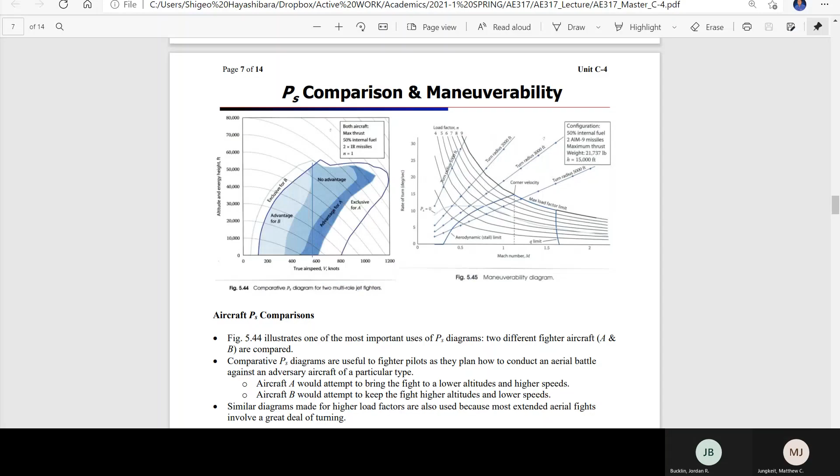He doesn't even move anymore. Good enough, yeah, it's a pattern. It increases as the semester goes on. I can kind of say who is sitting where. Okay, so next class, everyone moves seats.

Yeah, this is actually very strict on EE majors taking summer class. I'm teaching thermodynamics for EE majors. Everybody sits in the same spot in every single class. They never move, so I'm almost thinking of stopping taking record because it's the same thing every class. EE majors are very, I don't know.

Is there any funny stories you can tell us from their presentation on Tuesday? What presentation are you talking about? Something with 200 degrees Celsius water? Well, there was an ANSYS simulation, and they said the temperature of water was 190 degrees C. Then I said it's not liquid anymore.

It is superheated vapor, so a phase change must happen. So anyway, something was wrong in the heat transfer simulation. Did it also say like 1,000 degrees or something? No, it's not that strange. I mean, that's so obvious. Everybody laughed at it, we got a water temperature here of 1,000 degrees. People laughed at it, it's not even realistic, it's not physical.

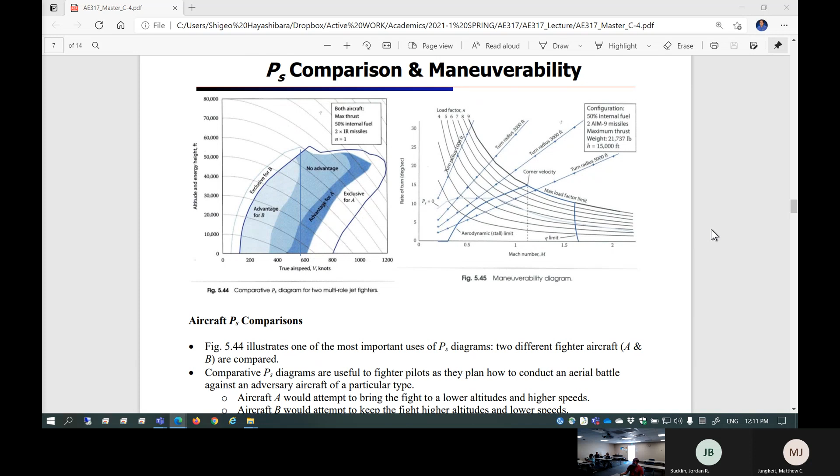Okay, it's not recorded. Alright, so okay, let's begin. Oh my goodness, yeah, maybe you should record it. Outtakes from AE317, he needs a little director thing, he needs to put it on the camera. Director's cut, take two.

So we are going to pick up the PS diagram, and then the other diagram is the maneuverability or energy maneuverability diagram. This is the specific excess power. This diagram basically tells how much the airplane can still maneuver. This is a PS equal to zero contour for two different airplanes. This contour belongs to airplane B, and this contour belongs to airplane A. So for two different airplanes, you can compare the specific excess power plot.

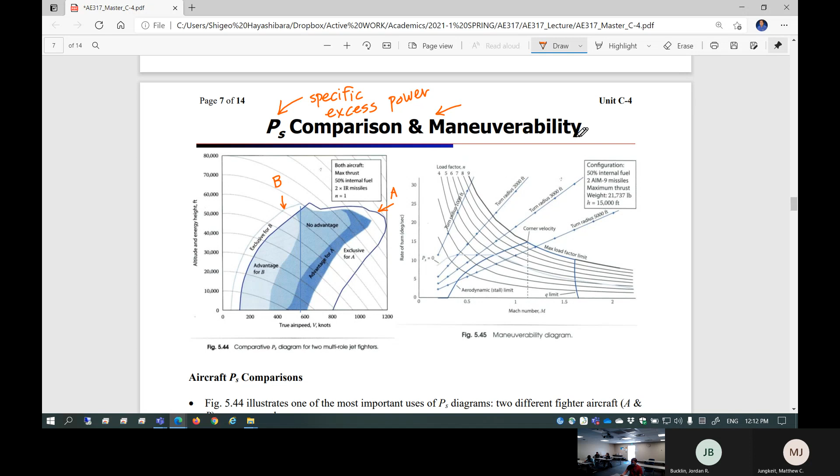This plot actually tells quite a bit of information. Both aircraft have a maximum thrust condition, 50% internal fuel, 2 AIM-9 missiles, and n equal to 1. So this is a level flight, not maneuvering, but maneuver weight, sort of. A combat-ready type of configuration, straight level flight.

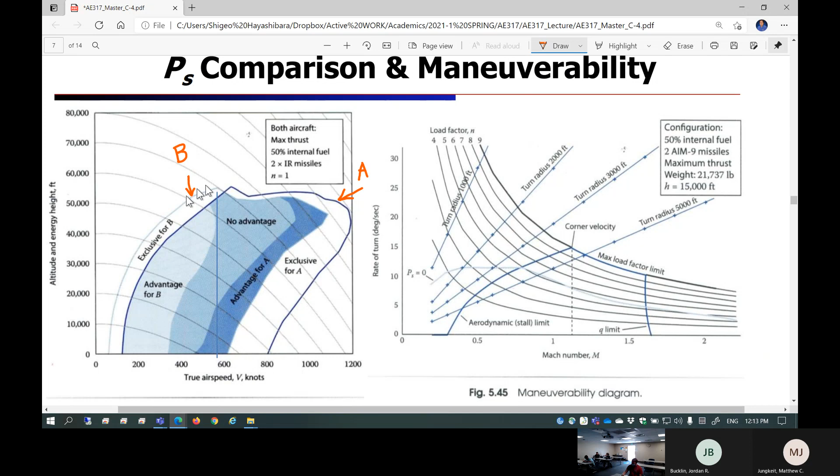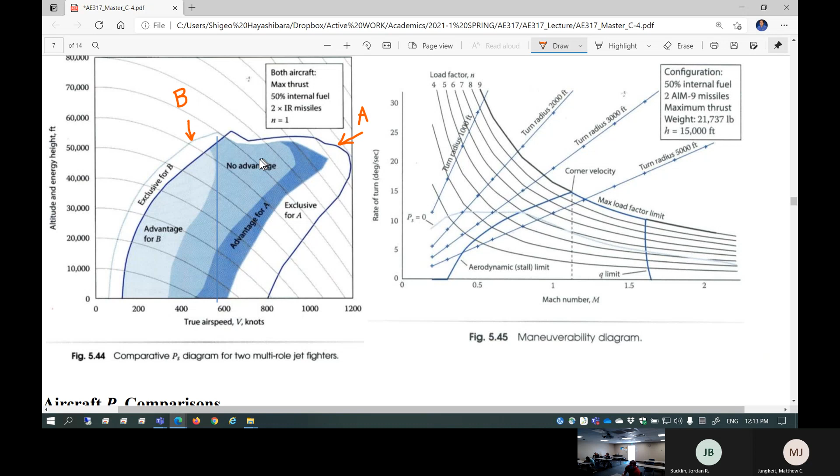Obviously those two airplanes are designed for different regimes of flight. Airplane B is sort of a higher altitude and lower speed range type of airplane, so its flight envelope covers the lower speed and higher altitude, relatively speaking. Airplane A is higher speed, with about the same altitude, but at some altitudes airplane B has an advantage, or is sometimes exclusive. Airplane A cannot maneuver around here. Especially at low speed and from low to high altitude, airplane B has the advantage. And airplane A at the high speed range, almost from low to high altitude, has an exclusive advantage against airplane B. So you can tell those things by comparing.

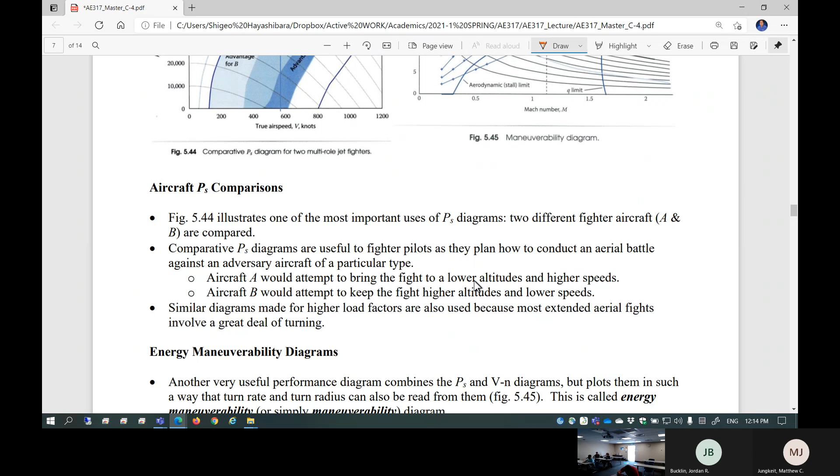This is the aircraft PS comparison, so you are seeing airplane A and B. Aircraft A would attempt to bring the dogfight, if they choose to do so, to a lower altitude and higher speed. That's airplane A, a high-speed airplane, and the maximum speed is also different. Maximum speed of airplane B is about 1,100 or a little bit less, while airplane A goes up to 1,200, at a slightly lower altitude, something like that.

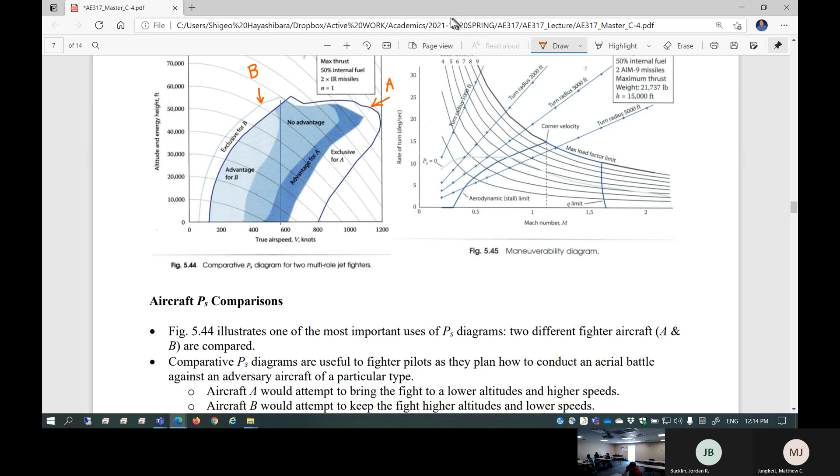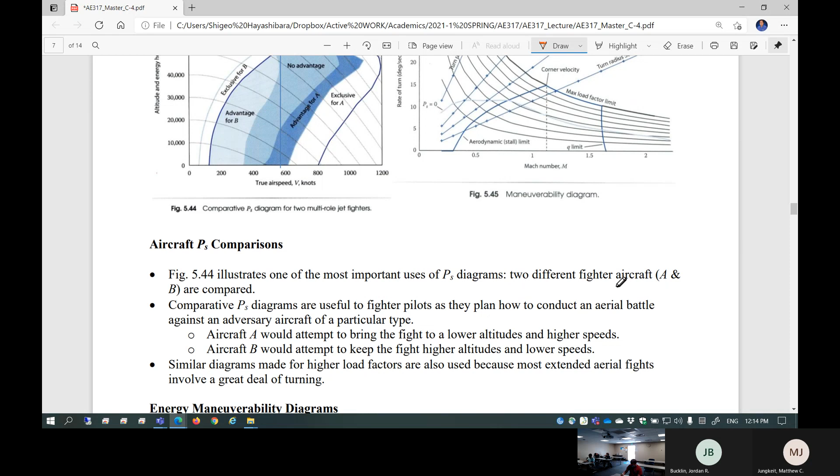So aircraft B is designed for low speed and higher altitude, looks like. Now, obviously, you need to compare those two airplanes with a lot more other data also - load factors, wing loading, engine size, other things. So that is the PS comparison.

So today we want to talk about the maneuverability diagram. This is the diagram we want to take a look at. It's an interesting plot, a composite plot, with lots of information plotted in a single figure, so you have to be very careful reading it. This is based on a single configuration, a fixed configuration.

This is 50% internal fuel, 2 AIM-9 missiles, maximum thrust. Weight is 21,737 pounds specific, and altitude is 15,000 feet. Over this configuration, this is the load factor: 9, 8, 7, 6, 5, 4, this is 3 and 2. So the load factor plot is 2 to 9, positive load factor.

And then plotted against this is the turning radius. Turning radius is also a contour, a straight line: 1,000 feet, 2,000, 3,000, 5,000. Now one thing which is missing is 4,000 feet - it's kind of skipped between 3,000 and 5,000, so I wish I would add one more line here. 4,000 is in between 3 and 5, so I'm going to add another straight line, something like that. This is 4,000. Before we move on, for some reason the 4,000 feet line is missing.

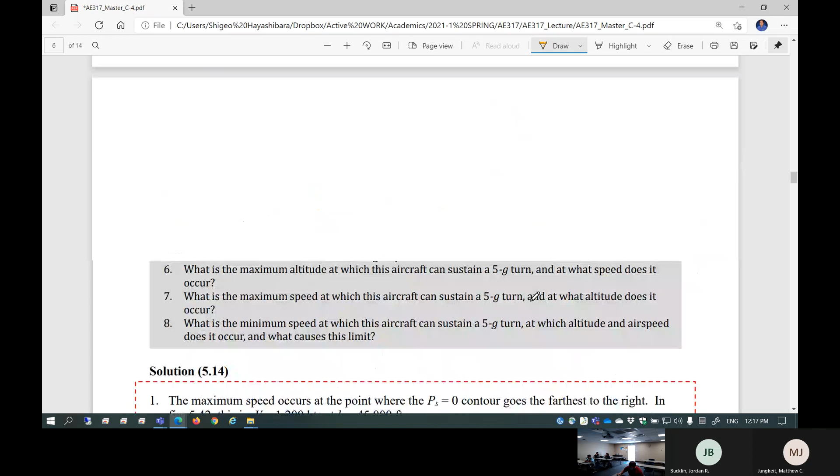All right, and then other things - this is a PS equal to zero contour. Let me just trace it out with different colors. So this is the PS equal to zero contour line, plotted like this, and that corresponds to one of those things. And also this one - this is the aerodynamic stall limit line from the V-n diagram. If you go back to the V-n diagram, this is the aerodynamic stall limit line, which is this line. It actually corresponds to this line being plotted.

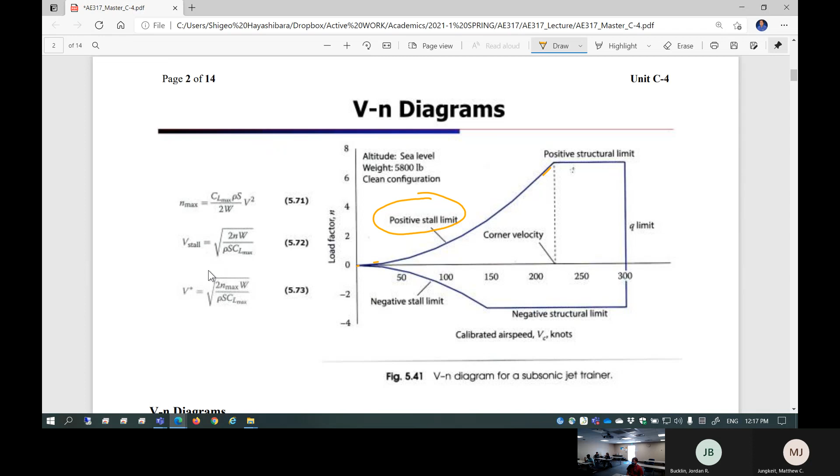So for those two lines, is anything on the line, or is it anything above or below? I'm talking about the graph from before - so this is the aerodynamic stall limit. That means everything above is stalled, so it can't do any of those turns. That's right.

Wait, if PS is equal to 0, does that mean anything above that isn't also technically possible? That's right, it's actually instantaneous. PS equal to 0 gives you sustainable turn. Anything above it is unsustainable, but you can still instantaneously perform that, so it tells you instantaneous performance too, it just doesn't sustain. So you could pull it for a second and then lose it? That's right.

Okay, so right here, the maximum load factor 9, and then this aerodynamic stall limit crosses over here. This point is the corner velocity. So this is V-star.

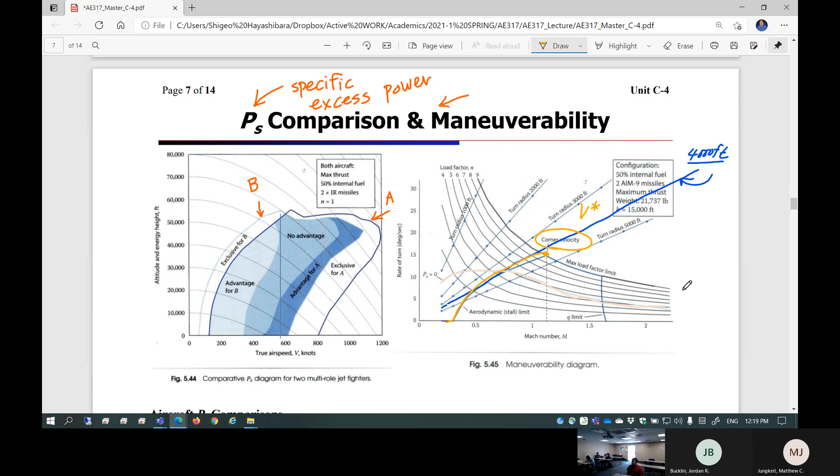So this is a combination of the V-n diagram plus turn radius overlaid on top of it. This is the energy maneuverability diagram. An important thing is the PS equal to 0 contour is also plotted. Inside of this contour is sustainable because you still have excess power, but outside of it you cannot sustain it. You can only instantaneously turn that radius, but you cannot maintain that. So this is called the energy maneuverability diagram.

So one important thing is this is the combination of excess power and the V-n diagram, combined together, with at least the PS equal to 0 contour given. So PS equal to 0 contour is overlaid with the V-n diagram. This is basically a plot where turn rate and turn radius can both be read off. That's why this is called the maneuverability diagram.

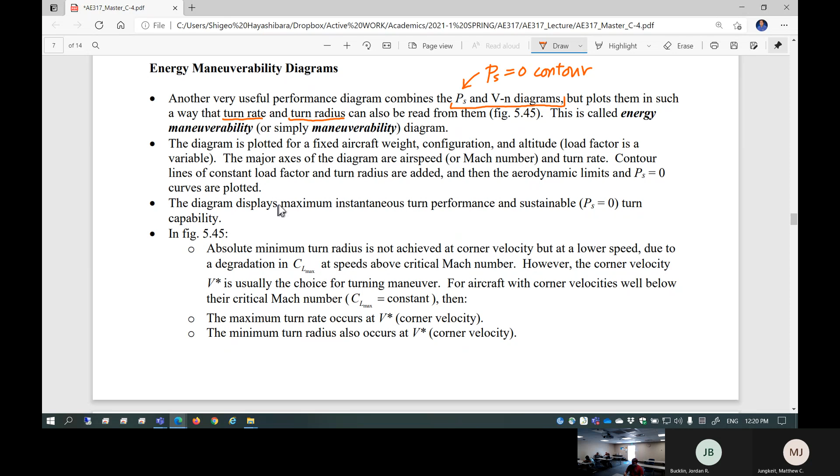And this is basically plotted for fixed aircraft weight, configuration, and altitude.

All right, so this is actually kind of interestingly confusing. You have to think a little bit about what it means. The absolute minimum turn radius is not achieved at corner velocity, but at a lower speed.

If corner velocity is beyond the critical Mach number - oftentimes this is the case - corner velocity is often above critical Mach number. If so, corner velocity is not going to give you minimum turn radius. It could give you maximum turn rate, but the turn radius kind of overshoots because you're flying at a really fast speed. But typically, the corner velocity is the choice for turning, usually.

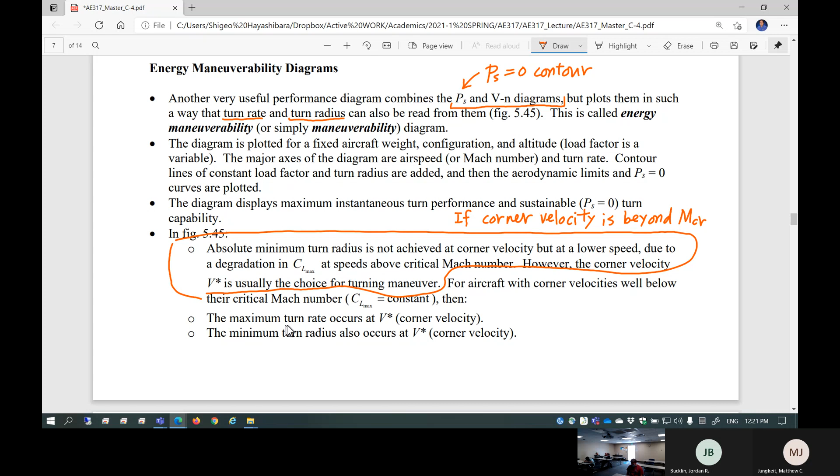So let's be careful about that. If the corner velocity is beyond the critical Mach number, you can only get maximum turn rate, but not the minimum turn radius. To achieve minimum turn radius, you have to fly at a lower speed than corner velocity. This actually happens for high-speed airplanes. Especially if you design a high-speed airplane, corner velocity is much higher than critical Mach number. In such a case, you can maximize the turn rate, but you cannot minimize the turn radius. To minimize the turn radius, you have to fly slower. Does that make sense?

Most of the airplanes you design are low-speed airplanes. If so, don't worry about this. For a low-speed airplane, corner velocity achieves both maximum turn rate and minimum turn radius. So in this case, for high-speed airplanes, you have to fly slower to minimize the turn radius.

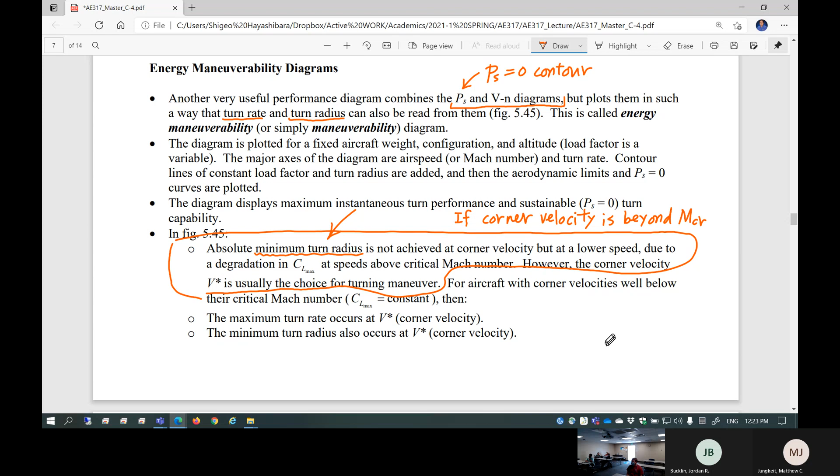All right, so that's what I'm trying to say here. For your design, every single airplane you're designing right now probably has corner velocity giving minimum turn radius and maximum turn rate anyway, so don't worry too much about it. But for some high-speed airplanes, this actually happens.

Okay, so this is example C-4-3. There are three questions for this example problem. Let's take a look. What are the maximum instantaneous turn rate, minimum instantaneous turn radius, maximum sustained turn rate, and minimum sustained turn radius at h equal to 15,000 feet? This is the plot for h equals 15,000 feet for the aircraft whose maneuverability diagram is given here.

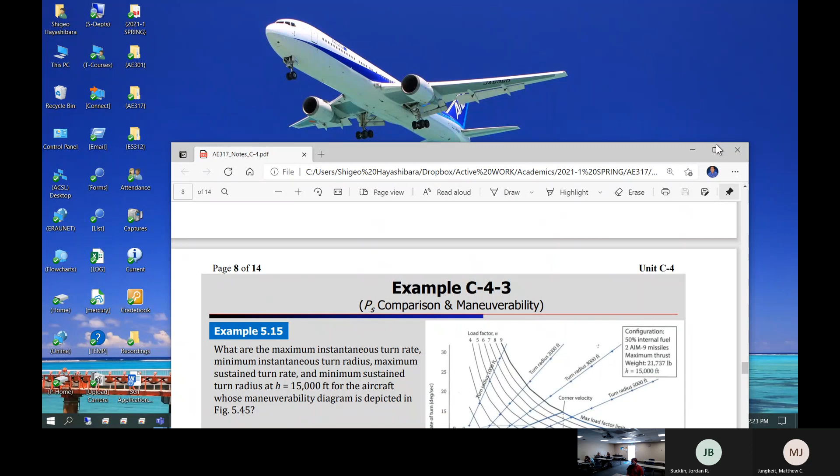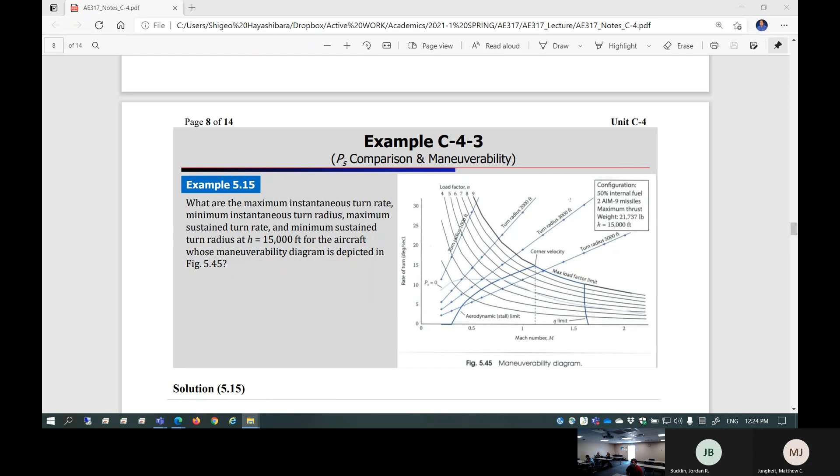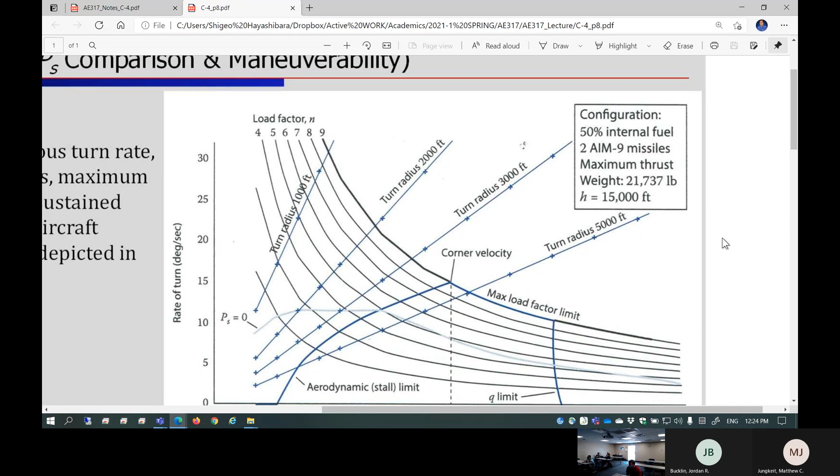Okay, so I'm going to bring up the figure. I really want to zoom in to this figure. So first question is, what is the maximum instantaneous turn rate? Number one, maximum instantaneous...

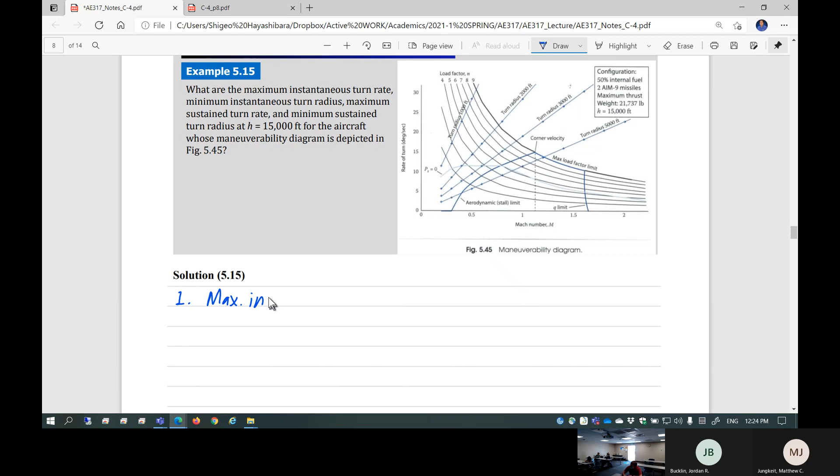So you're talking about, what's the condition for that? This is a corner velocity. Now, question is, is this sustainable too? It depends on your PS diagram, of course, yeah?

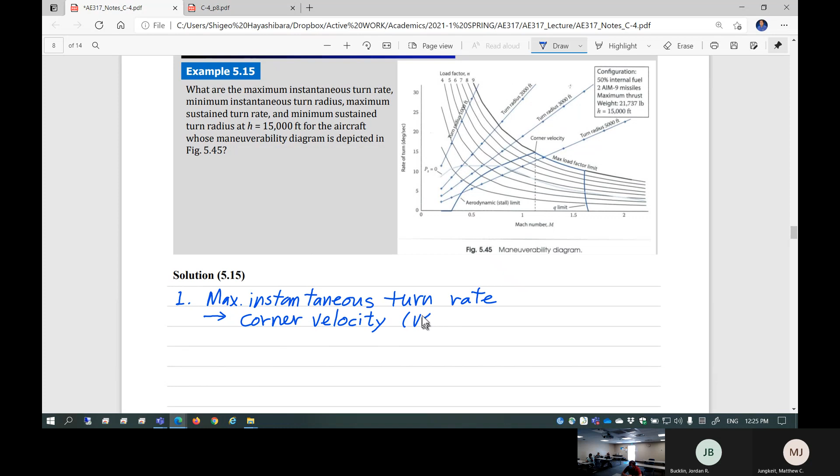Corner velocity, V star, so you're going to pick up the corner velocity. If you really zoom in, corner velocity is the crossing point between the aerodynamic stall limit and where it reaches the maximum load factor limit right here. So this is the corner velocity.

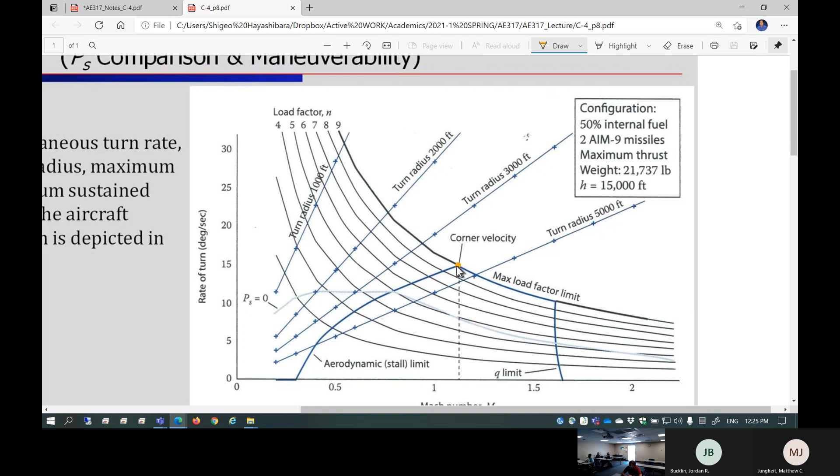So you can read off the Mach number corresponding to this. This is the corner velocity Mach number. And then you can basically read off this value about here. That's the rate of turn. So this is the instantaneous maximum rate of turn because your airplane is flying at the corner velocity.

So let's just go back here. This really is going to give you the read off of Mach number. What's the Mach number, by the way? Anybody? 1.15 based on the textbook. Oh, pretty. That's pretty good.

And then the rate is about 15 degrees per second, by read off. Okay, so this is actually corresponding to corner velocity.

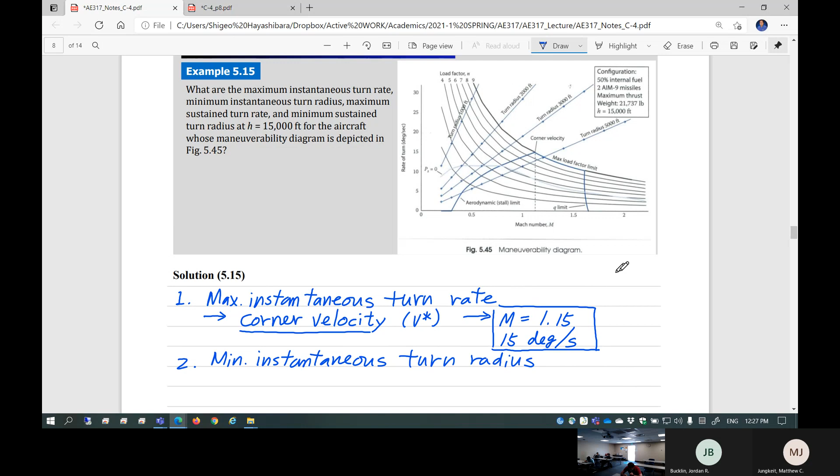Question number 2, minimum instantaneous turn radius. So this depends on the stall characteristics of your airplane. In other words, you want to make a very, very tight turn without the airplane being stalled.

So this is a crossing point between the aerodynamic limit line as it crosses the lowest valued constant turn radius line.

This is kind of tough. The reason is, I added one line. Where is it, oh okay sorry, let's just go back here. So what I'm talking about is, this is the aerodynamic stall limit line.

Along this line, your airplane actually stalls or is not stalled, it's just a borderline, okay? Anything above, your airplane stalls out. So by maintaining this line, what is the minimum turn radius? Well, obviously, a turn radius of 3,000 feet is impossible. So it's going to be bigger than that. Now, so is that 5,000 feet? I don't know. Suppose I can only imagine a 4,000 foot turn radius, but it's not drawn here.

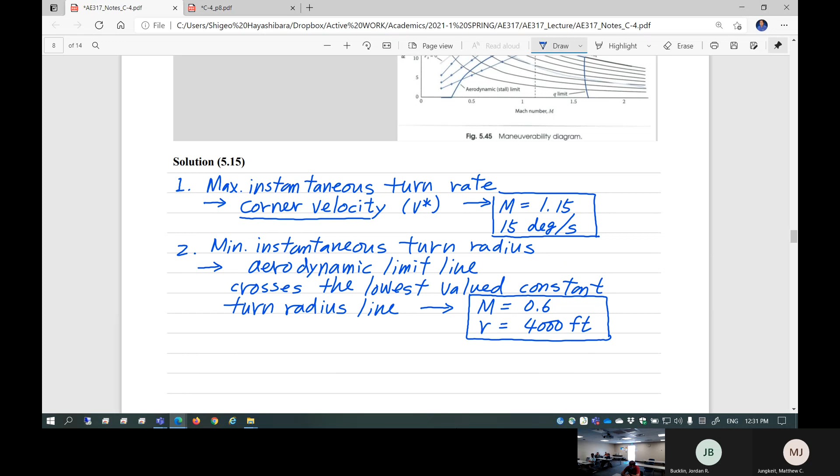Now, if this is an exam problem, I will probably add the 4,000 foot line myself for the figure, so that it's more clear. This is not so clear. This is probably the second nature of Air Force Academy people, to make things not so clear. I don't like it, but anyways.

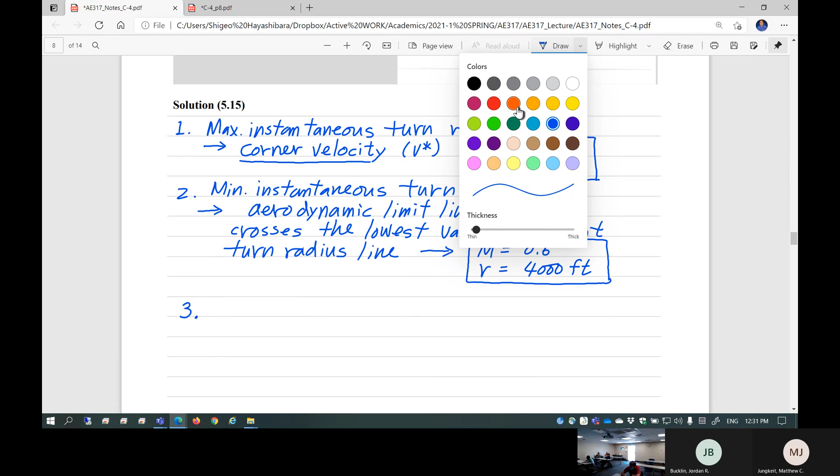So the third question is, okay, so what is that question? What is the maximum sustained turn rate? By the way, one important added comment here, okay? So this is minimum instantaneous. Is it instantaneous? Can you sustain this?

Yeah, yeah, oh yeah, oh yeah. This is under the contour of PS equal to 0 line. So this is actually sustainable. So this is actually the minimum sustainable turn radius also. So in other words, you have pretty good excess engine power for this case.

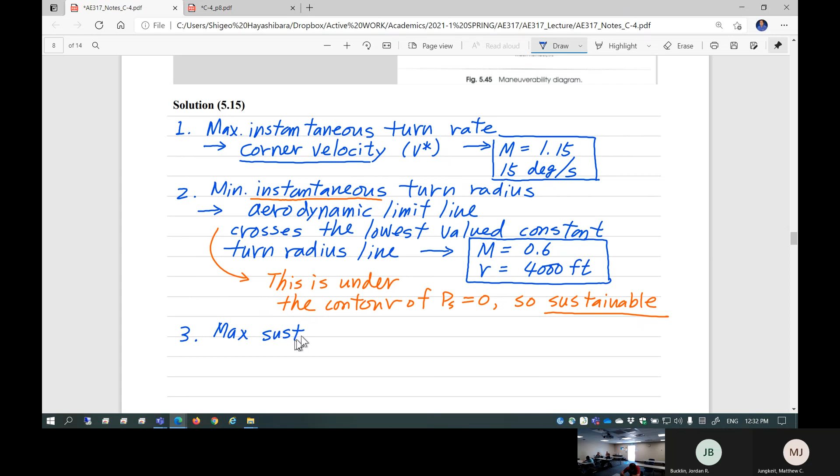Okay, so question number 3, what is the maximum sustained turn rate? So now you're talking about max sustainable turn rate. This is contrary to question 1. Question 1 was the maximum instantaneous turn rate. Now you're talking about, okay, so what is the maximum sustainable turn rate?

Okay, so this actually comes into play at the point where the PS equal to 0 line intersects with the aerodynamic limit line.

So this is the condition: in order to sustain the maximum sustainable turn rate, you have to consider both. In other words, the PS equal to 0 line contour and the aerodynamic limit must cross together. That's going to be the maximum rate.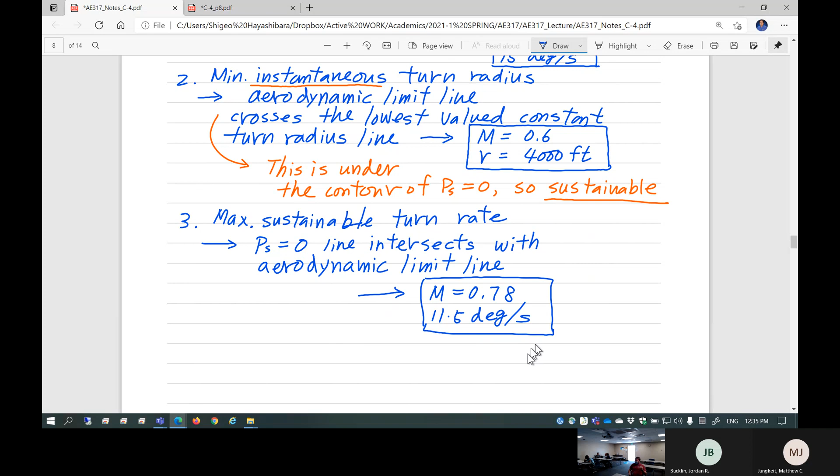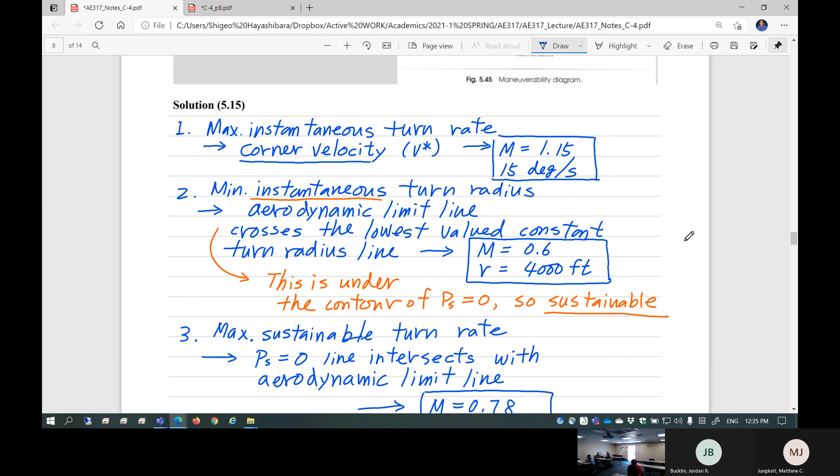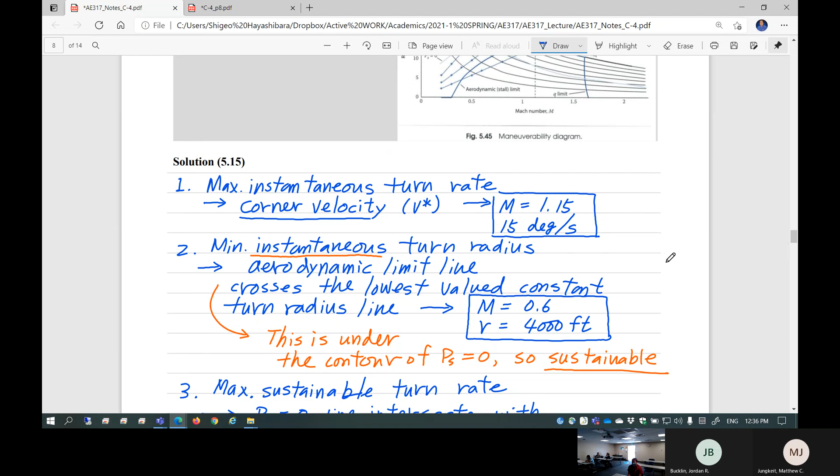Any question here? So mainly your read-off is turn radius and also turn rate, okay? And then constrained by the aerodynamic limit line - in other words, you're going to stall if you go beyond it. And also the PS equal to 0 line is essentially how much excess power is no more available. That means you cannot maneuver anymore beyond that contour, the PS equal to 0 line.

Any question here? Like I said, this is a very easy target for the exam because for the exam problem, I can basically cut and paste this figure and then say, hey, find out what is the minimum sustainable turn rate over, I don't know, load factor 7 or something like that. I can create any question I want. You can read off the value from here.

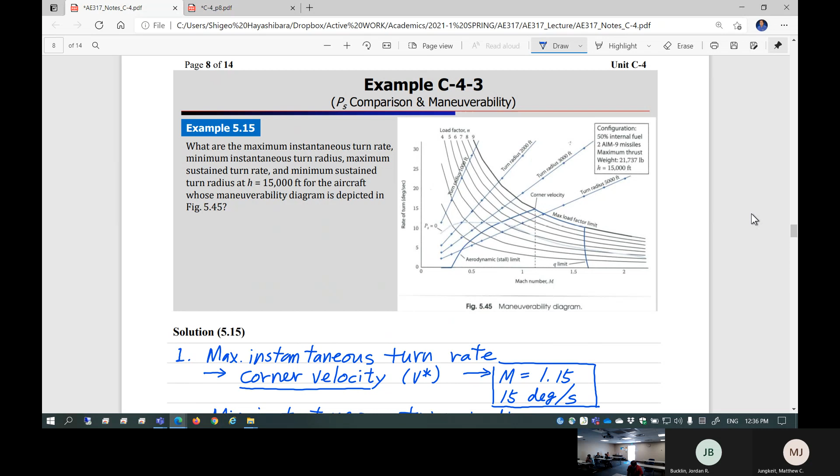Okay, so this is quite an interestingly important figure here, and also important is the PS diagram. So if I give you this kind of PS diagram, I can create a bunch of questions so you can read off the values. Okay.

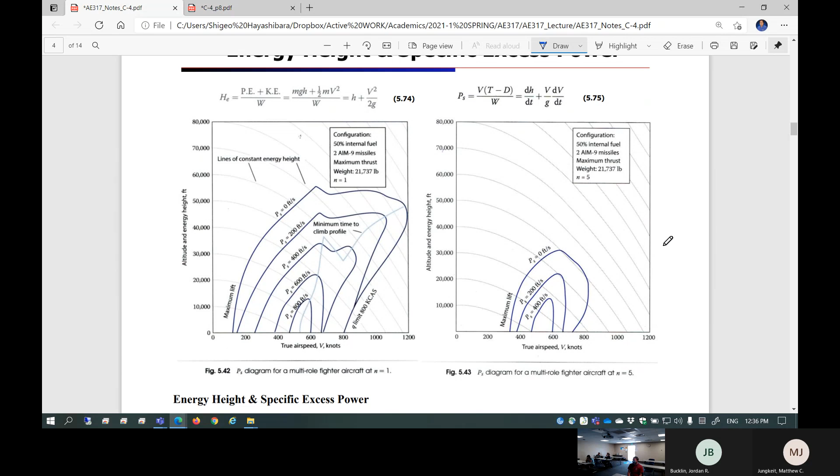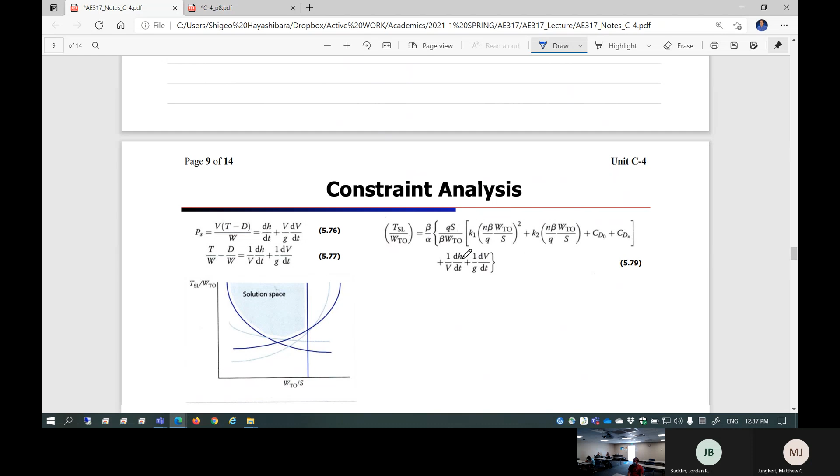All right, so let's just take a look at the constraint analysis. This is going to be your quiz material - the last quiz of the semester is going to come from constraint analysis. So why do we need to do constraint analysis?

In other words, this is going to be a plot of two unique parameters of the airplane. One is this, one is that. Have you ever heard of this? This is takeoff weight divided by area S - this is something called wing loading.

Wing loading. The wind? Wind, not the wind - wing. I have a tendency of that mistake. Wing loading, okay. So a high wing loading airplane is sitting right next to the bookstore. That's a very high wing loading airplane. Okay.

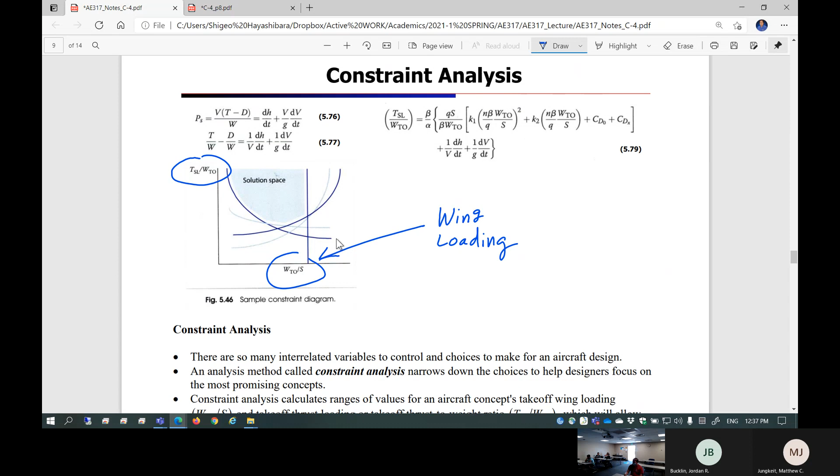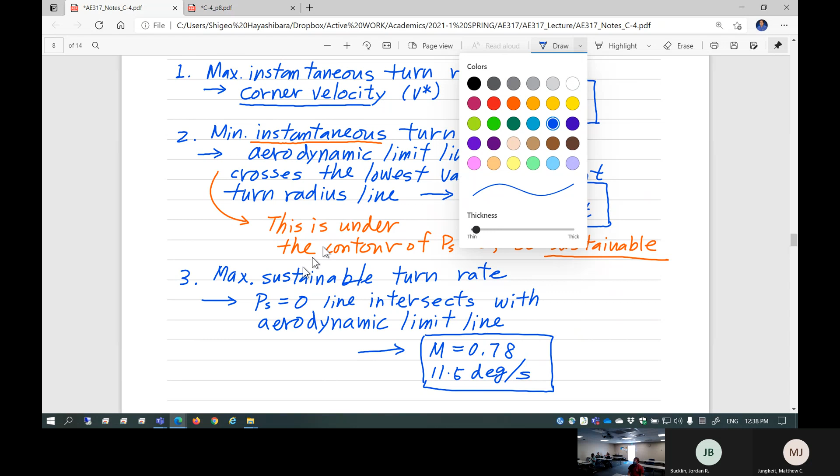Great. Yep, for the exam from home, did we get minimum sustained turn radius? Do we get that? No. Oh, yeah, minimum sustained, the other one. Yeah, that's right, minimum sustained. Oh, I might keep saying - well, maximum, one is sustainable, the other one is the minimum. Wait a minute, or maximum? No, it's all good, yeah, it's all good, the answer is there, in the orange.

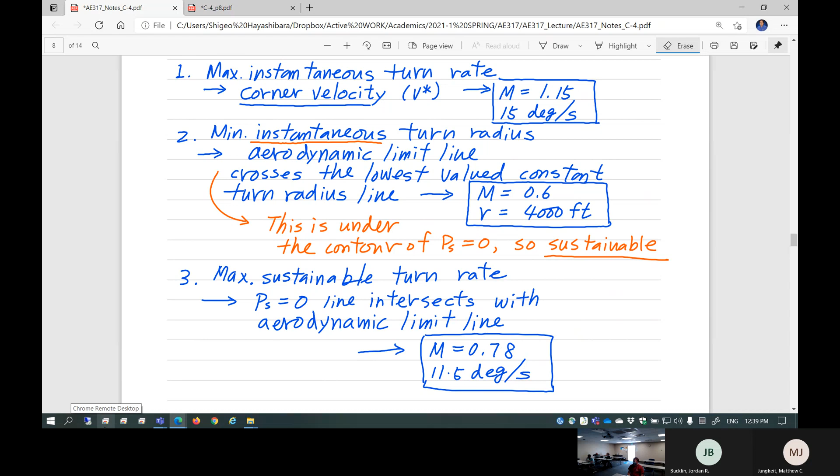And did I answer minimum sustained turn radius? Ah, that's this one, right? Yeah, that's - okay, sorry, I'm slow, slow to understand, okay, I'm getting old. I cannot reflect, yeah, I need some time to think about it. Anyways.

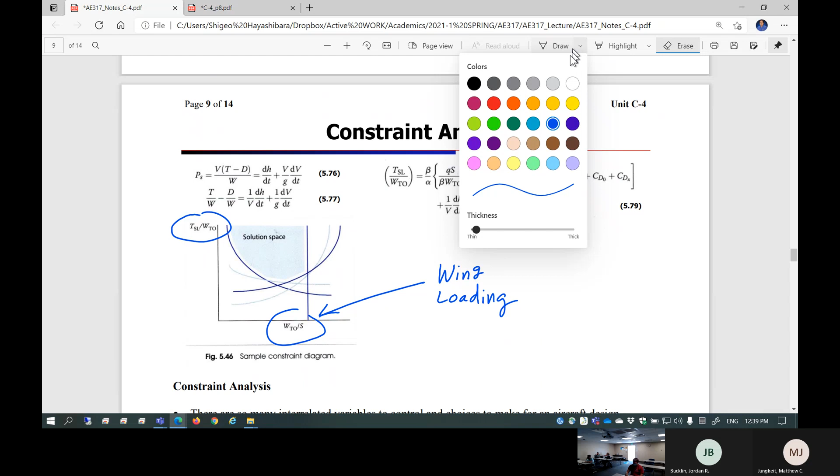Okay, now how about this then? This is thrust to weight ratio. Huh.

So those two are actually quite important design parameters because this determines almost the size of your airplane. In other words, thrust to weight ratio determines how big your airplane's power plant should be - what kind of engine should I choose, how many do I need? That's the thrust to weight ratio, and of course it depends on the weight of your airplane.

So suppose you come up with a monster airplane, just like you guys are designing - you'd end up needing like 10 jet engines. And then wing loading is, okay, how big does your wing need to be? Can I just support this heavy tanker airplane with this kind of wing? No.

This is going to actually determine your airplane's initial sizing - a huge impact. So you really want to have a solution space. That means, hey, this is the possible choice of combination of thrust to weight ratio and wing loading based on the constraints.

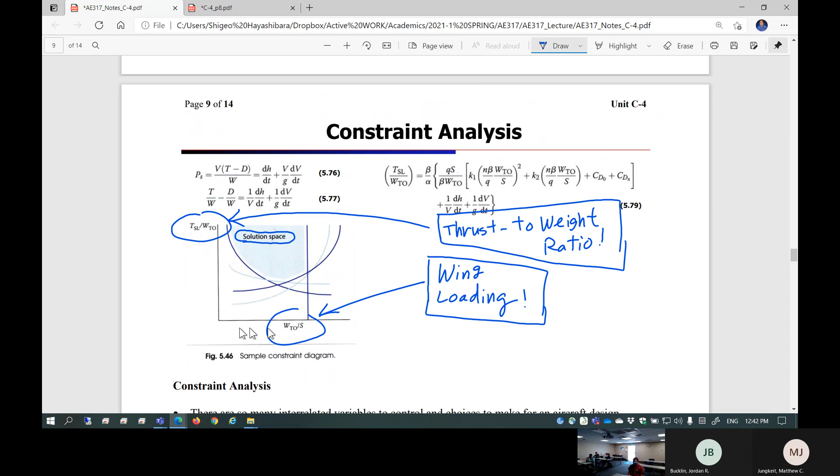Realistically speaking, what kind of range of combinations of thrust to weight ratio and wing loading can we have? That's called the solution space, okay. So constraint analysis comes with a master equation to begin with.

So the master equation comes straight from the specific excess power equation, which is velocity times thrust minus drag. Obviously, thrust information comes from your choice of power plant. Drag is how beautifully your airplane is designed aerodynamically using XFOIL/XFLR5 - that's drag, yeah, that's right. You spend all of that time coming up with this drag, minimized.

And then how heavy is your airplane? Like one of the insane requirements of SAE is, okay, you have to bring this much hunk of metal. And then you go like, what are you talking about, with this much wingspan? Let's go for a biplane - that's why you go for an extreme choice.

Okay, so this equation is going to change form and come up with a master equation. The master equation is a function of thrust to weight ratio, and a function of wing loading. So you can plot thrust to weight ratio against wing loading as a function.

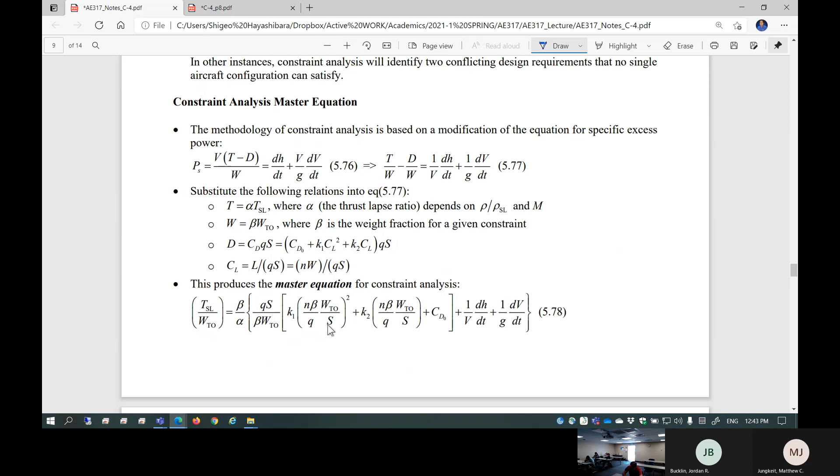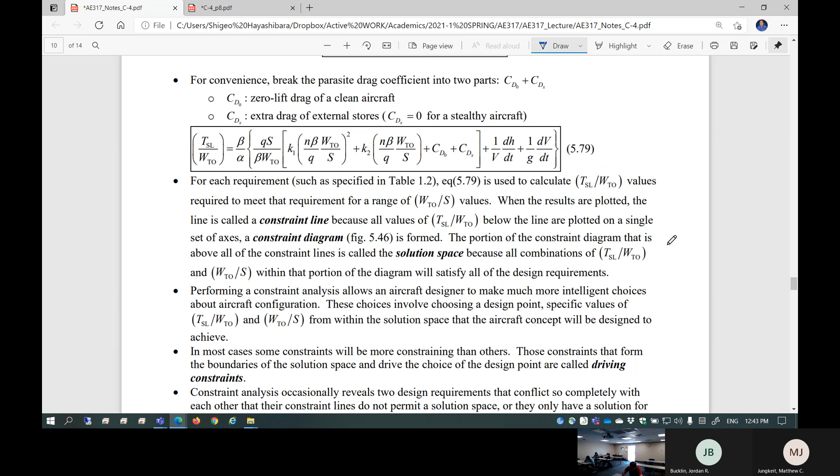So this function depends on parameters including alpha, beta, W takeoff, wing area S, Q, and N - N is the load factor. Okay, so this is the master equation of constraint analysis. Then you can actually plot the constraint diagram. Let me just go ahead and take a look at the constraint.

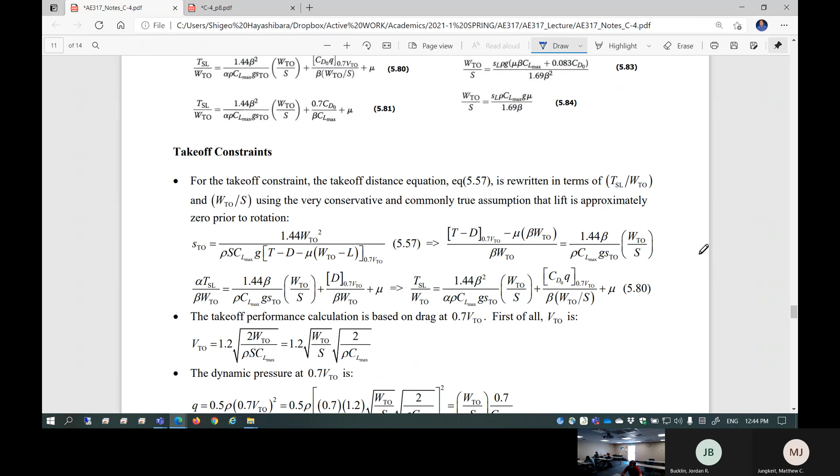So what kind of constraints are you going to consider? One is takeoff and landing. The takeoff and landing equation we covered in unit C3 - it's going to be expressed in terms of thrust to weight ratio and wing loading. So this is the alternative equation to the takeoff constraint.

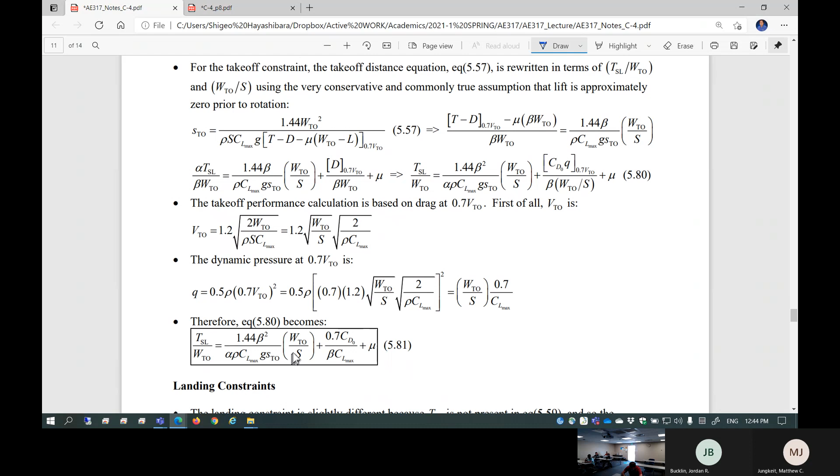So for takeoff constraint, in order to satisfy a takeoff constraint of, say, we need a 2,000 foot takeoff distance, you're going to come up with this plot. This is the thrust to weight ratio as a function of wing loading to satisfy that 2,000 foot takeoff distance.

Landing constraints are also very similar. So this is a constraint equation for airplane landing - in order to have this airplane land within a 2,000 foot runway, what is the relationship with wing loading? Oh, this is only wing loading. That means with a heavy airplane, just like you guys have, with this much wing, you can never satisfy this.

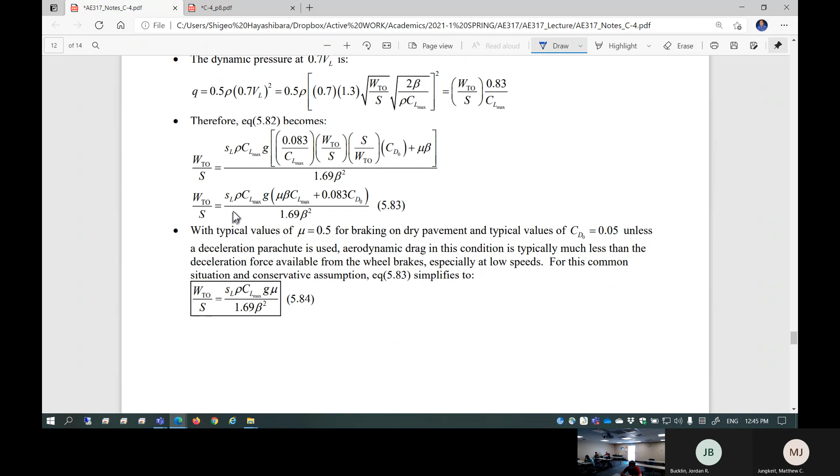You need to have a certain wing area to satisfy this, or make your airplane much lighter. You do something, otherwise we can never satisfy this constraint. So you're going to come up with what is required to satisfy this constraint, okay?

So let's just take a quick look at example C44. This is the constraint analysis example. There are a few parameters you can only estimate, so let's be careful about that - I'm going to go slowly here, okay? So this is a constraint analysis example. Based off of this example, you're going to work on quiz 5. Quiz 5 is a constraint analysis quiz, okay?

What is the airplane I want you to analyze as a constraint analysis? That is one of those stealth airplanes, F-22 prototype 1. I'm going to give you all sorts of constraint requirements you're going to analyze and find out the design space.

That's the quiz 5, that's so cool. Yeah, that's going to be the last quiz of the semester. Give us more than a day to do it. I haven't made up my mind yet. Do you have a request? Do you want to make it due tomorrow morning? No, can we give a couple days to do it? Next week, right? Yeah, okay. It's going to take some time, this quiz will be. Yeah, that's what I was asking. Then I'm thinking, how many points did I give you for the previous four quizzes? 20 points? They were usually 1 out of 10. Out of 10, right? Yeah, then this double quiz, I don't know, I can make it like 50 points or something, and then you get double that. Yeah, you can basically recover all of those lost points in the previous quizzes, if you do it right. If you screw up, lots of points.

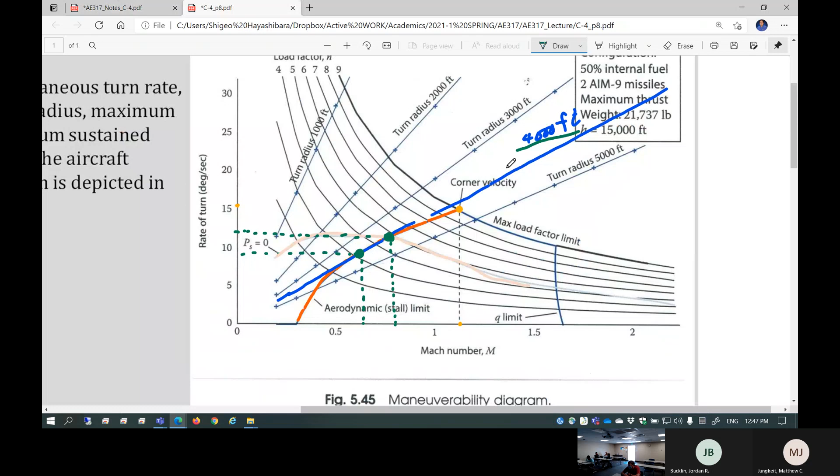So constraint analysis example here, consider the multi-role fighter design requirements from table 1-2. Let's just go back to table 1-2. Table 1-2 is this. Remember that? So this is the constraint, in other words.

So requirements: combat mission radius 400 miles, weapons payload, this is the maneuver weight. Takeoff and landing distance 2,000 feet. And then also instantaneous turn rate and specific excess power, 4G at Mach number 1.2, 20,000 feet mean sea level. So at 20,000 feet altitude, when you're flying Mach number 1.2, you have to have a capability of 4G level turn. You have to have that much specific excess power.

And then also this is a sustained load factor of 9G at Mach number 0.9, 5,000 feet. So we are going to tentatively call these: this is a supersonic turn, this is subsonic turn.

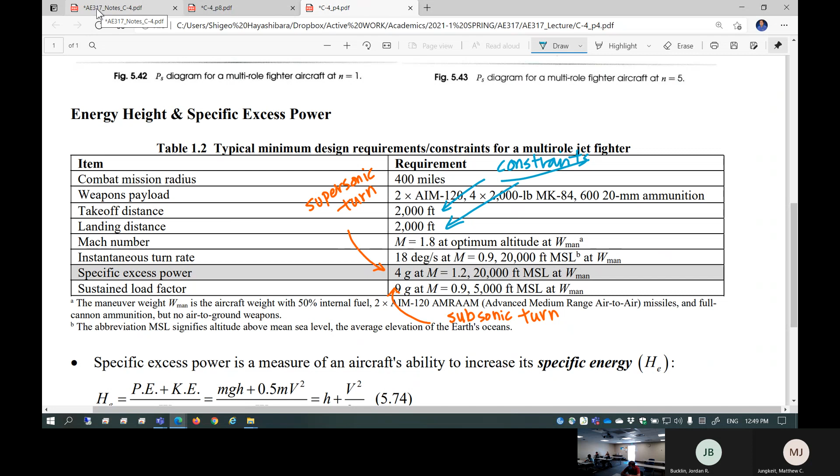So let's just take a look at notes C4. Here we go. Table 1.2, as you saw, specifies the following performance requirements. So this is the combat turn, this is the subsonic combat turn radius, Mach 0.9.

So this is combat turn, maximum afterburner. You're going to turn on the afterburner and try to do 9G sustained at 5,000 feet, Mach number 0.9, subsonic turn. This is a supersonic turn: maximum afterburner, 4G sustained at 20,000 feet, Mach number 1.2. So those are the 1 and 2 constraints already.

Now constraints 3 and 4: takeoff and braking distance, S-TO equal to S-L, is 2,000 feet. So this is the takeoff and landing constraints. So we have 1, 2, 3, 4 constraints.

Yeah, go ahead. When it says maximum afterburner, is that at that Mach number or better than that Mach number? Maximum afterburner, 9G turn, wait. Yeah, this is subsonic. No, I'm saying if it's maximum thrust, shouldn't your maximum thrust be able to exceed past Mach 0.9? So is it Mach 0.9 and better? But it takes energy to do that turn, so you're sustaining that Mach number.

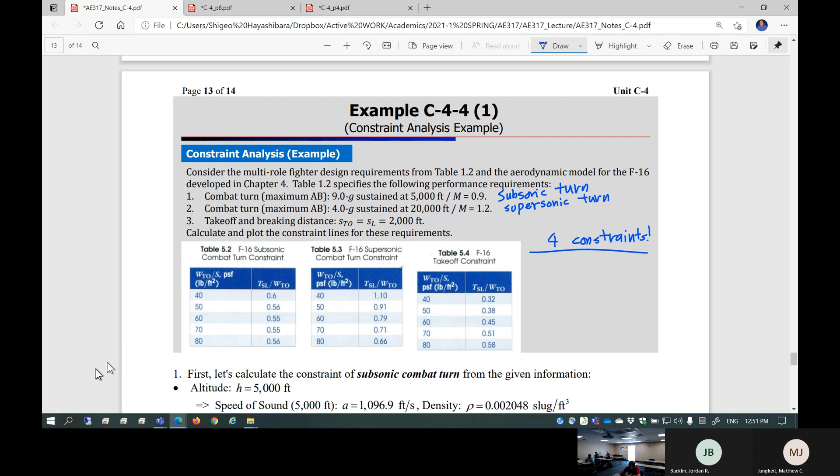That's the only thing you require, but it's a supersonic speed and higher altitude. So this is actually going to determine the size of your power plant, and at the same time how heavy and strong your airplane should be, kind of thing too, right?

So those are the 4 constraints. Now before you move on, I guess the first question is, can we really make that kind of stuff? Isn't this absolutely insane that no one can satisfy this constraint? Do we have a design space? That's the one thing we want to find out, and that's the purpose of this constraint diagram.

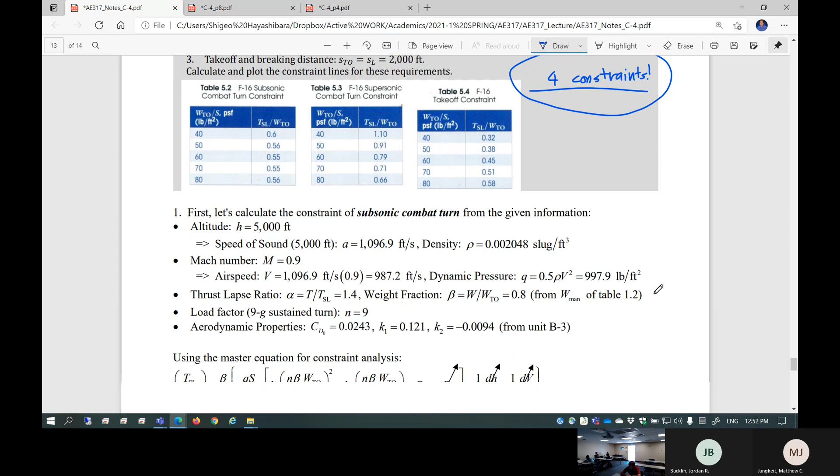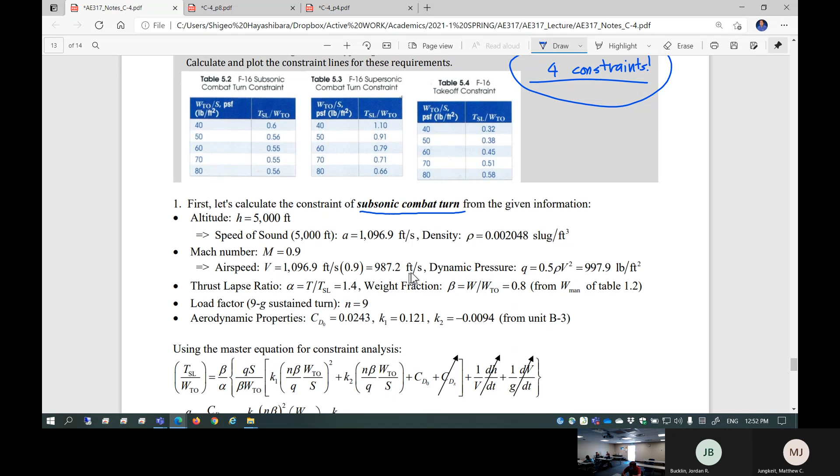So first of all, we are going to calculate the subsonic combat turn. Like I said, this is 5,000 feet altitude, Mach number 0.9. So at 5,000 feet altitude, speed of sound and density are given. Airspeed is 987.2 feet per second, and dynamic pressure is 997.9 psf.

Important thing is this is an estimate. Since this is maximum afterburner, alpha is thrust over thrust at sea level. Thrust sea level military power, for this situation, maximum afterburner thrust is estimated 1.4 times bigger. This kind of information you cannot easily get - either I have to give it to you, or you can make a really good estimated guess. So this is 1.4 times because this is maximum afterburner - max AB. So thrust sea level installed military thrust ratio is 1.4. This is like the maximum power you can squeeze out from your airplane.

Weight fraction is also again estimated by you. Over this maneuver, you are going to maneuver with the maneuver weight, which is 2 AMRAAM, 2 Sidewinder, full ammo, half fuel. This is maneuver weight, so this is 0.8 times takeoff weight - again estimated by you. So this is W maneuver, weight of maneuver, relative to takeoff weight. Let's assume that way.

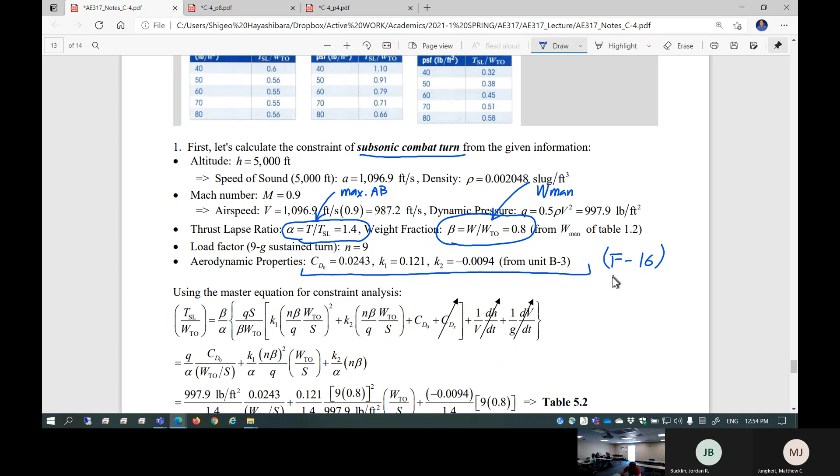This is a load factor 9G sustained turn. Aerodynamic properties we actually computed for the F-16, remember that? Yep, unit B3, that's right. So this is something you did by hand also - this is CD0, K1, and K2.

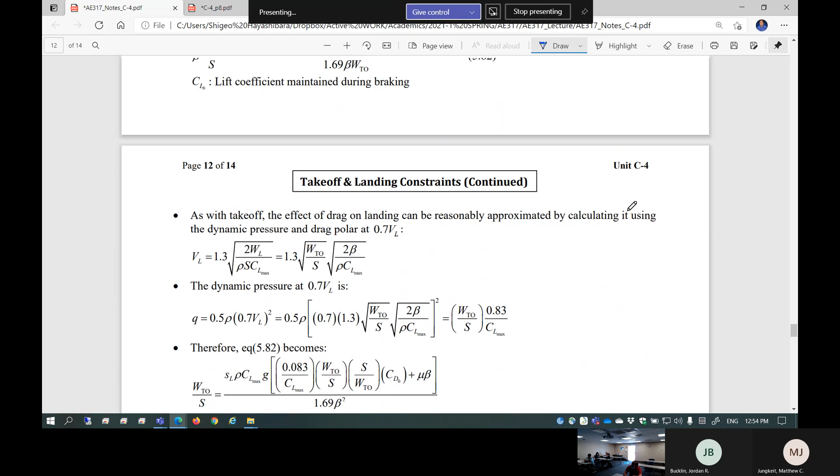So we are going to pick up the master equation for constraint analysis. You're going to compute TSL over WTO, which is the thrust to weight ratio. And then you are going to ignore the external stores induced CDX. We are going to, sorry I skipped it, split the parasite drag into 2 parts. For convenience, we break the parasite drag coefficient into 2: this is zero lift drag of a clean aircraft.

The CDX is external stores - in other words, you put external fuel under the wing, rocket pylons and stuff like that. If you add those things, you're going to add this external CD0. So this is the parasite drag because you're adding more ammunition under the wing, kind of thing.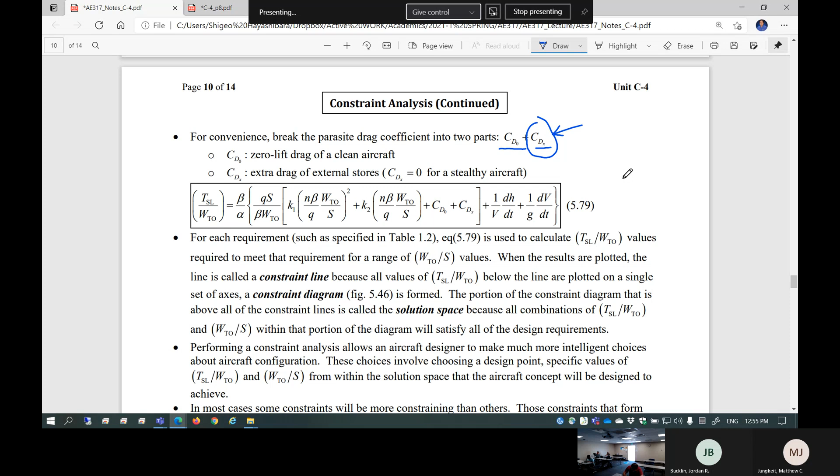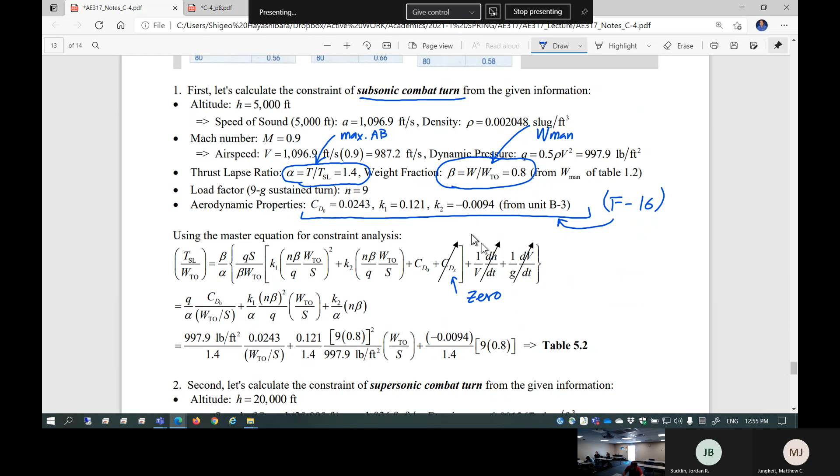CD0 is the clean configuration parasite CD0, zero lift drag coefficient. So I skipped it, sorry about that - that's actually completely ignored, zero, for this turn maneuver, because this is maximum afterburner with the maneuver weight trying to do a 9G turn. Hopefully you are not having under-wing missiles when you do that. So we simplify it. If you're picky, you can include this, of course.

Next is the supersonic turn - let's do a similar thing. Supersonic combat turn is given information: altitude 20,000 feet high altitude, and speed of sound and density are different. This is supersonic, Mach number 1.2, which gives you a different dynamic pressure. Now this is the thrust to weight ratio once again - this is full afterburner on, however at higher altitude. So thrust to weight ratio drops from 1.4 to 0.98, simply because this is higher altitude. This is maximum afterburner.

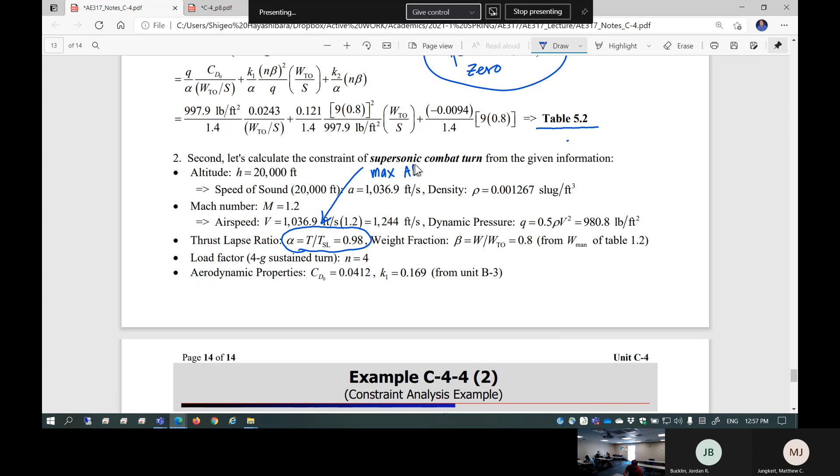Once again, this is estimated by you.

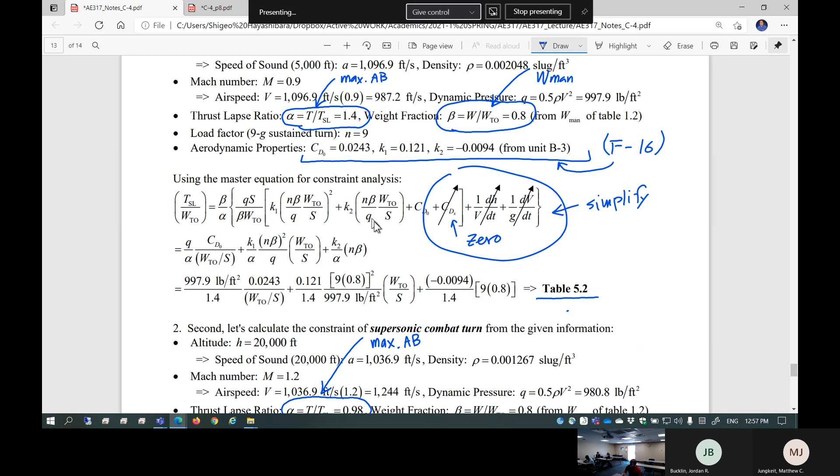So this is the lower altitude maximum afterburner. Thrust to sea level thrust ratio is 1.4. This is slightly lower, okay. Even though you turn on the full afterburner because it's higher altitude, you can get about the same thrust as if you are at sea level without afterburner on. That's what it is. This is the same weight fraction, 0.8.

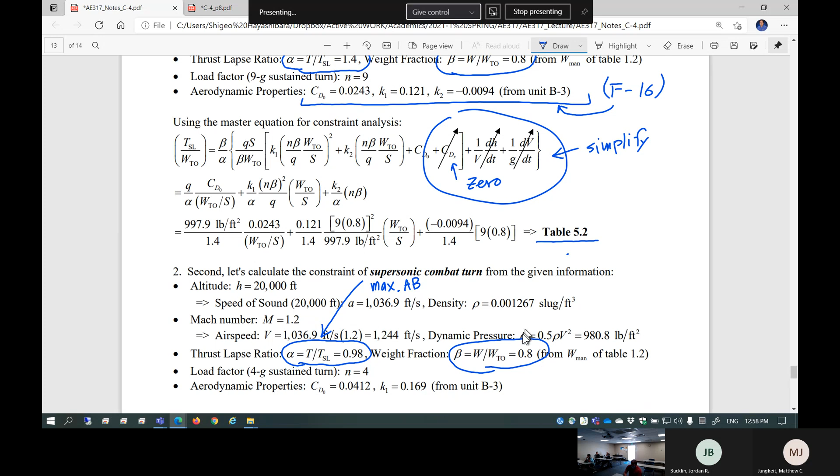Again, this is the maneuver weight, half fuel half ammo kind of thing. And then aerodynamic properties are different. Now it's different, again this is computed from unit B3. High speed CD0, which is different from low speed CD0, obviously.

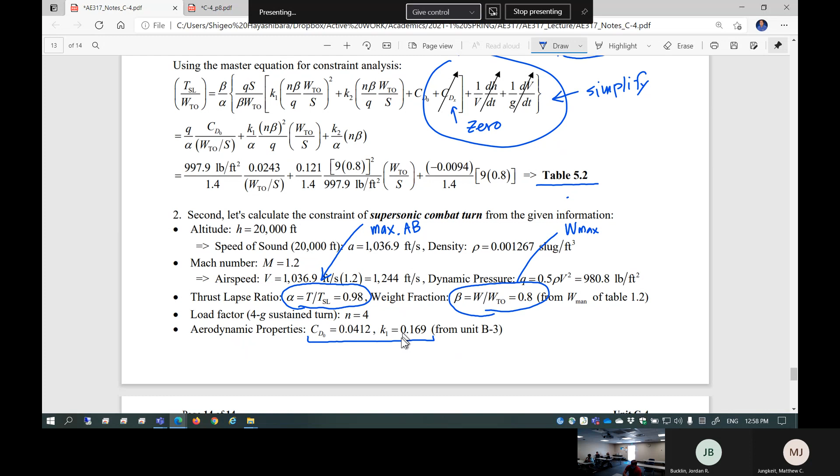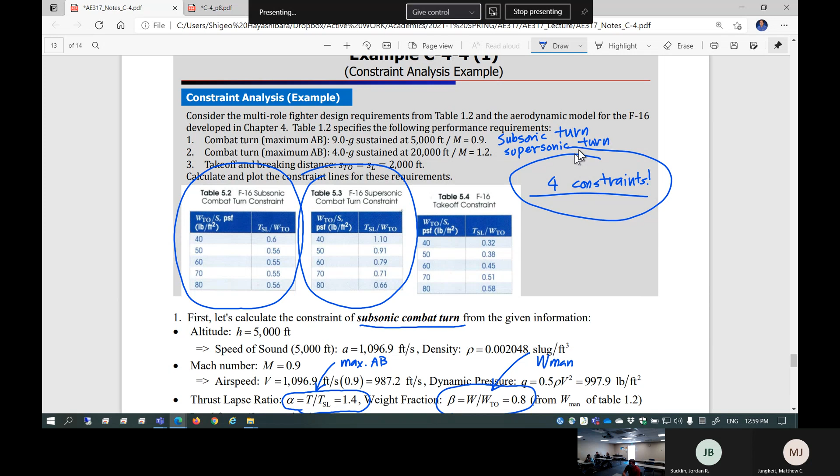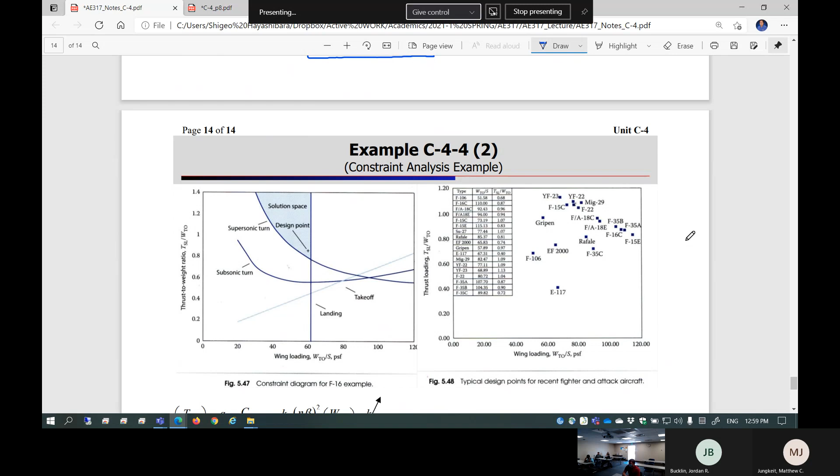Next is landing and takeoff, okay? Takeoff is, of course, you're going to come up with a takeoff constraint equation here. Altitude is 0, of course. CL max for takeoff comes into play. Thrust to weight ratio, this is 1.105.

This is because when you take off, you can possibly turn on afterburner. So with afterburner, you can bump up the thrust from sea level thrust to 1.105 with afterburner on. So this is again estimated, afterburner on, okay? If you take off without afterburner, it's going to be 1, obviously. This is a weight fraction, of course, takeoff weight. Weight is the takeoff weight, yes, right.

Okay, and then rolling friction coefficient, this is average for the paved runway. This is CD0 0.0519, typical value is 0.05. Takeoff configuration, landing gear down, plus flap, flaperon full down. This is actually informed in unit B3. This is F16 information, okay.

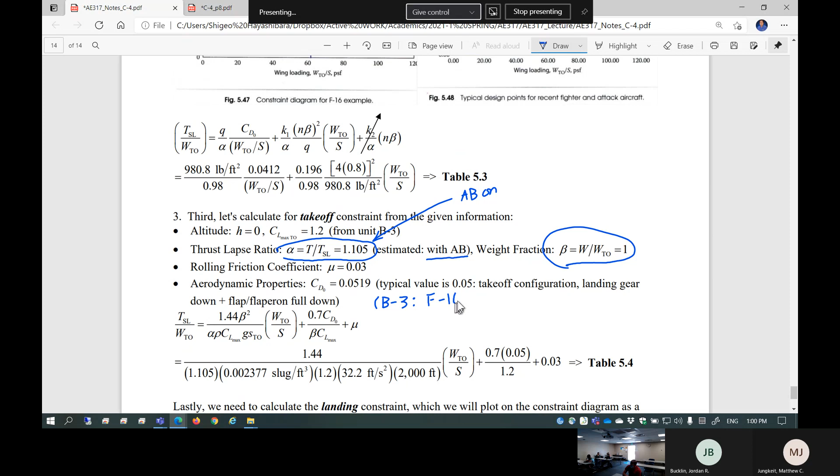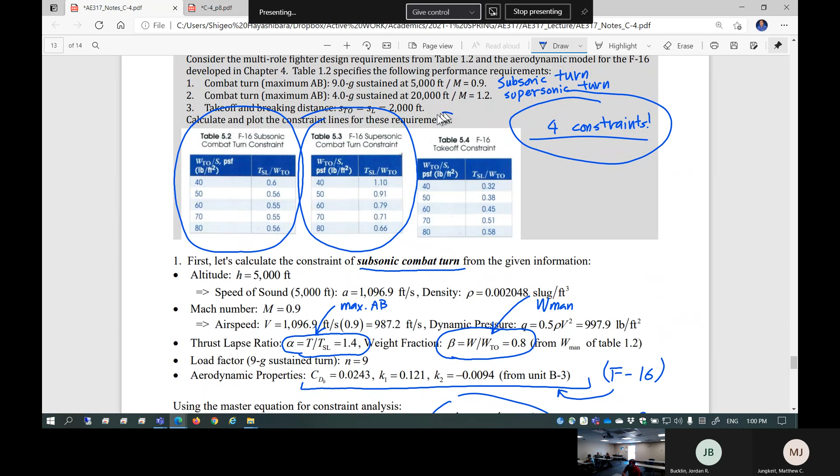With all of those values plugged in, this is another plot, table 5.4. This is the data set you compute for takeoff constraint. Okay, now you can plot this value. This is the takeoff constraint. Takeoff constraint is kind of a linear line, obviously. Anything above, you're satisfied, anything below, you're not.

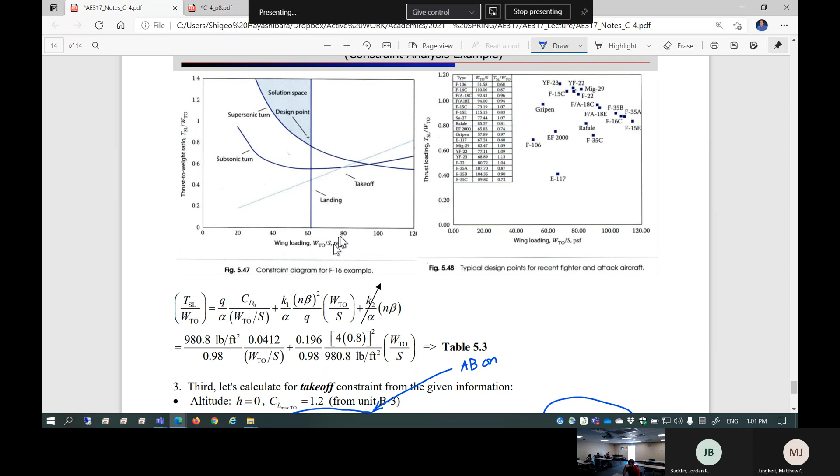Landing is a straight line up, okay, because this is only wing loading. In order to have a 2,000 feet landing, you need to have this much wing loading. Okay, so this is the vertical line, this is the landing constraint.

So if after everything is plotted, this is the potential solution space. You're going to choose any location within this solution space, but you want to pick usually something close to here, just the minimum value, minimum for both sort of.

Okay, so you're going to do the same thing for quiz 5. This is constraint analysis. I guess you guys probably did it in senior design, is that true? Did you do constraint analysis in senior design project at the very beginning, at the conceptual stage? We're not seniors. You're not seniors, right? No, we're not seniors. Really? You didn't do that, I thought we had seniors.

Anyways, so you're gonna probably do this, okay, at the very beginning of conceptual stage. In other words, this is going to eliminate some of the configurations you come up with. This may possibly eliminate your team's like canard configuration. I don't know, I hope not. If so, you have to reiterate. Well, then you go, oh, you realize, oh my goodness, canard airplane was a bad idea. This could be, okay, this is the typical value for lots of variety of airplanes.

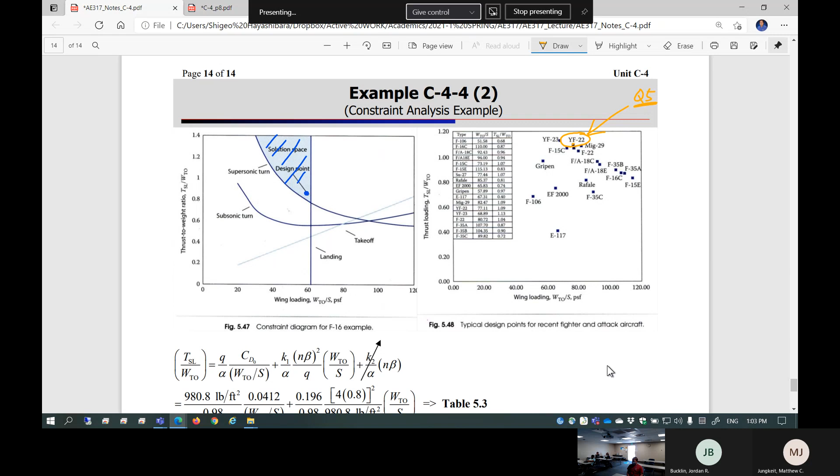So now, let me inform you, I'm going to give you quiz 5, which is this airplane. Yeah, this airplane, you're going to do quiz 5. So make sure you come up with a reasonable value of actual design point. This is the design point, YF22. You're going to come up with that based off of the constraint analysis you're going to perform. Quiz 5, okay, alright, so do you have any question here?

That's it for Unit C4.